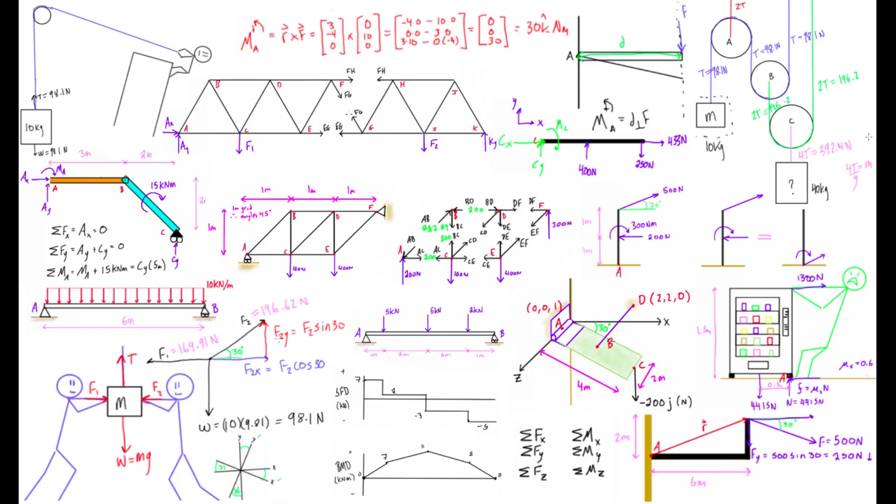Today I am going with very basic and fundamentals of mechanical engineering, that is engineering mechanics. Because one cannot reach the destination without starting from zero. Let's start with introduction to engineering mechanics. Engineering mechanics, my knowledge sharing session.

Let's discuss about applied science. The branch of science which coordinates the research work for practical utility and services of the mankind is known as applied science.

Engineering mechanics. The subject of engineering mechanics is that branch of applied science which deals with the laws and principles of mechanics along with their applications to engineering problems. As a matter of fact, knowledge of engineering mechanics is very essential for an engineer in planning, designing, and construction of his various types of structures and machines.

In order to take up his job more skillfully, an engineer must pursue the study of engineering mechanics in a most systematic and scientific manner.

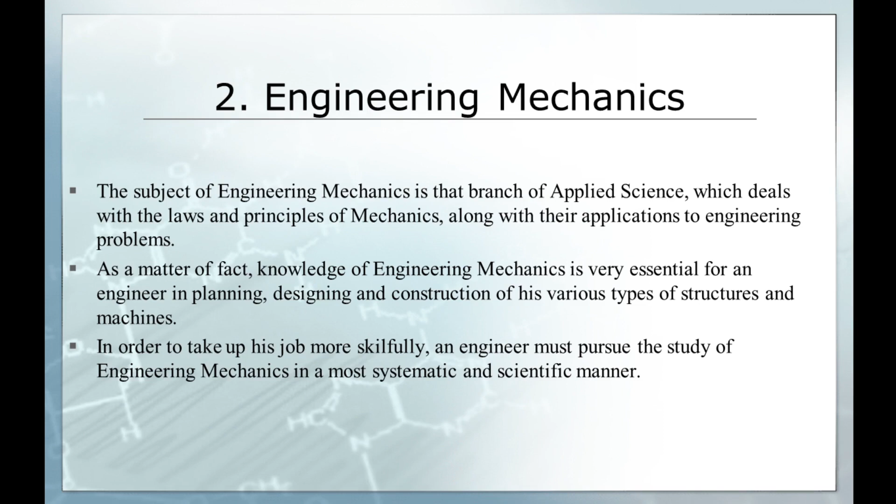Divisions of engineering mechanics. The subject of engineering mechanics may be divided into the following two main groups: first, statics, and second, dynamics. Statics is that branch of engineering mechanics which deals with the forces and their effects while acting upon the bodies at rest.

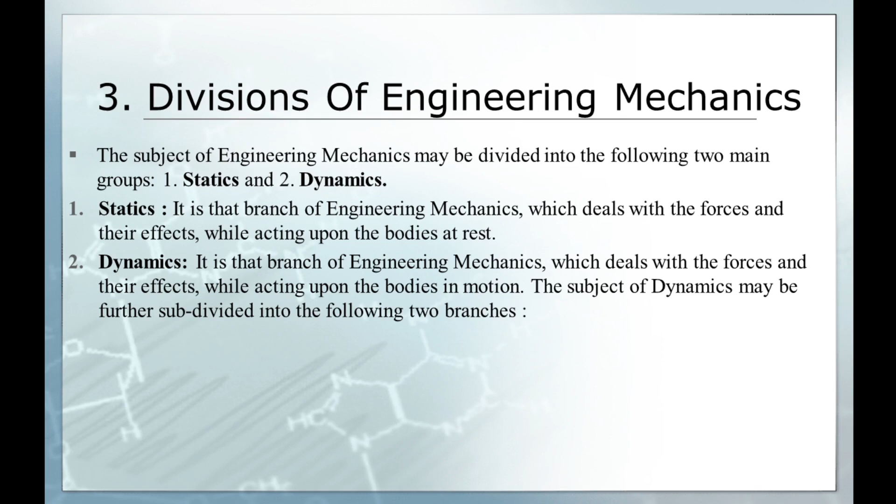The second is dynamics. It is that branch of engineering mechanics which deals with the forces and their effects while acting upon the bodies in motion. Friends, see the difference between statics and dynamics: statics when bodies are at rest, dynamics when the bodies in motion.

This subject of dynamics may be further subdivided into the following two branches: first, kinetics and second, kinematics. Let's see what is kinetics and what is kinematics.

Kinetics is the branch of dynamics which deals with the bodies in motion due to the application of forces. Kinematics is that branch of dynamics which deals with the bodies in motion without any reference to the forces which are responsible for the motion.

So the difference is that in kinetics, the body has gained motion due to some application of forces. But in the case of kinematics, the body is in motion, but without any reference to the forces which are responsible for the motion. It means for that motion, these forces are not applicable, or because of these forces, the body is not getting any motion.

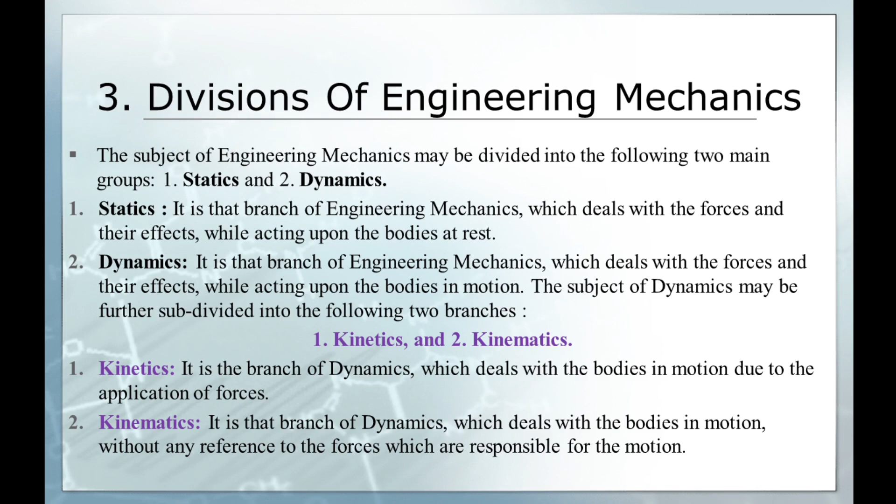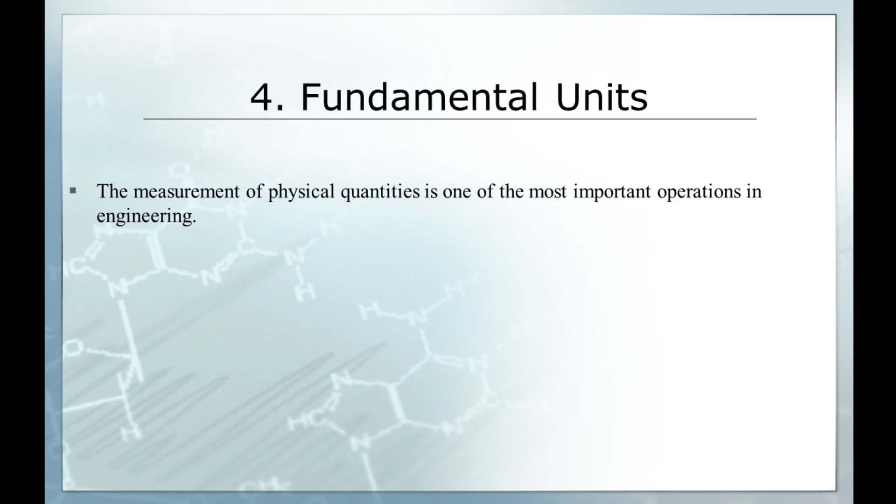Fundamental units. The measurement of physical quantities is one of the most important operations in engineering. Every quantity is measured in terms of some arbitrary but internationally accepted units called fundamental units.

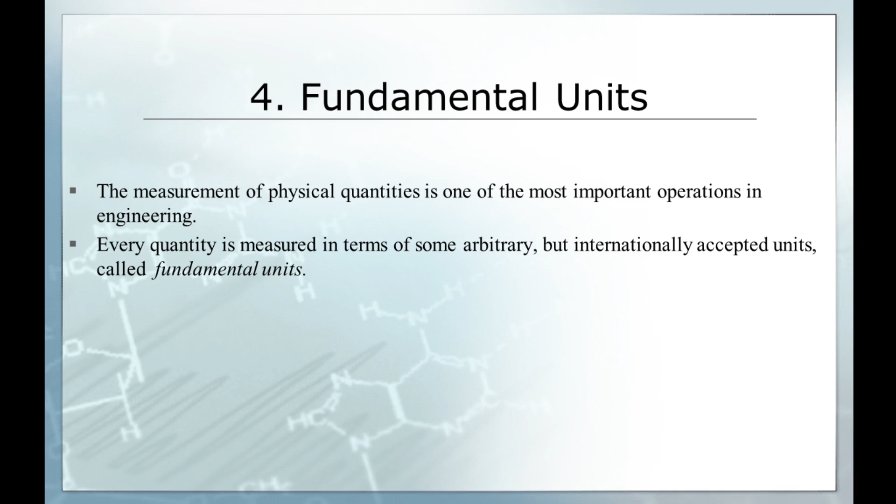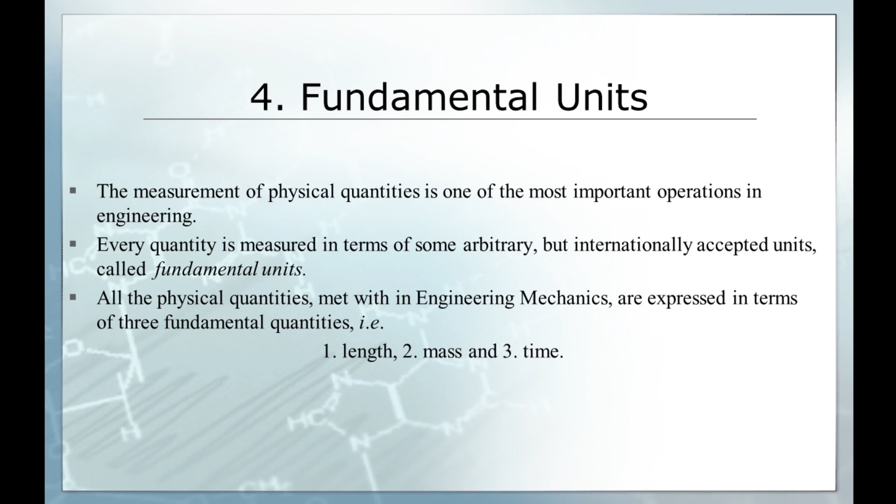All the physical quantities met with in engineering mechanics are expressed in terms of three fundamental quantities: first length, second mass, and third time.

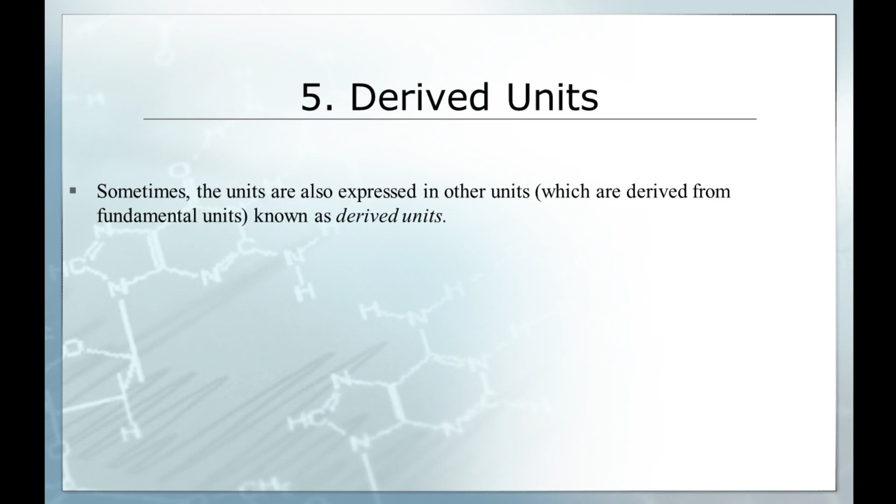Derived units. Sometimes the units are also expressed in other units which are derived from fundamental units, known as derived units. For example, units of area, velocity, acceleration, pressure, etc.

Unit of area is mm square. Mm square is not a fundamental unit, but it is derived from the formula of multiplying or dividing or by doing some mathematical calculations and deriving that unit. So that is why unit of area is called a derived unit.

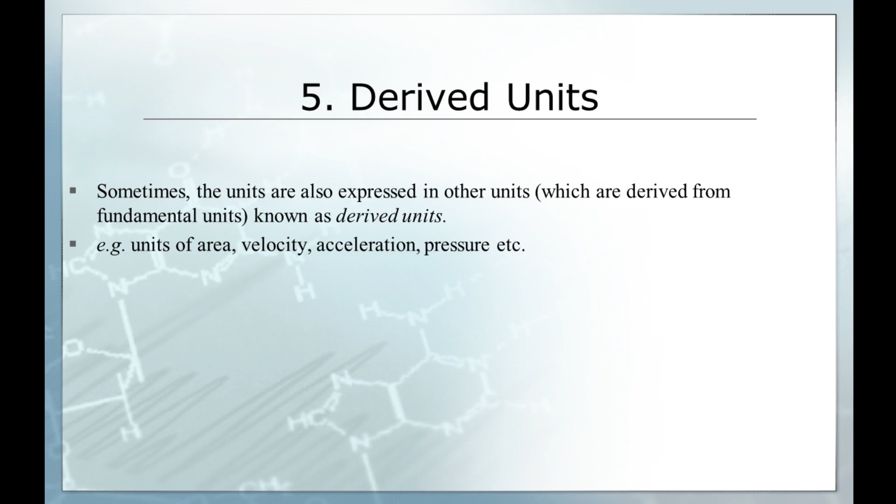Similarly, unit of velocity is meter per second. Unit of acceleration is meter per second square. Unit of pressure is Newton per mm square or Newton per meter square, etc.

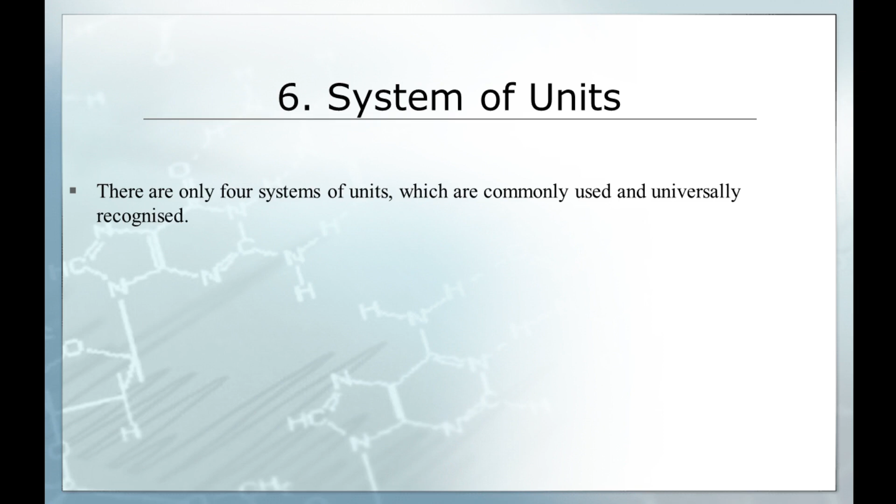System of units. There are only 4 systems of units which are commonly used and universally recognized. These are known as: first, CGS units, centimeter, gram and seconds. Second, FPS units, foot, pound, seconds. This system is still being used in the USA, United States of America.

Third, MKS units, meter, kilogram, seconds. And fourth, SI units, called International System of Units. We shall use only the SI system of units as explained ahead.

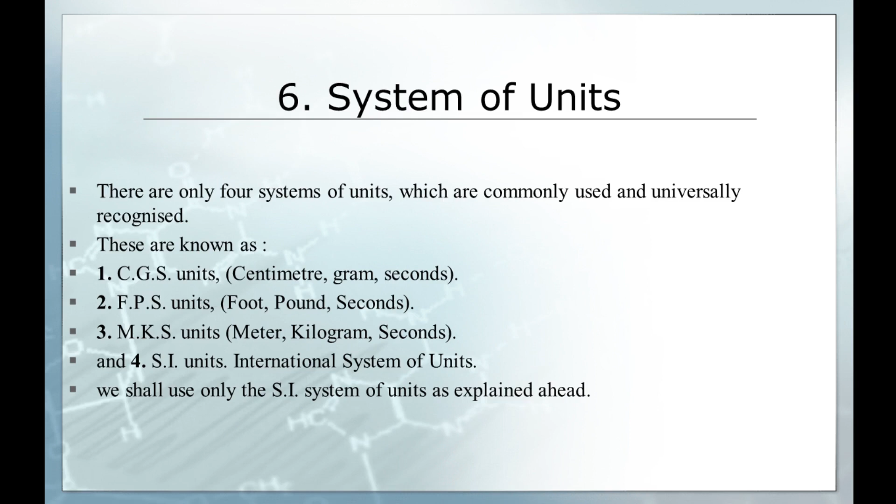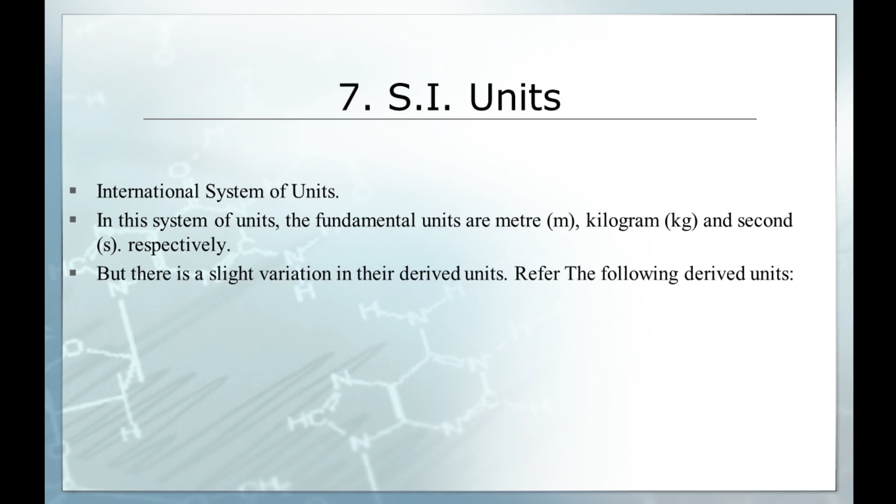SI units, International System of Units. In this system of units, the fundamental units are meter, kilogram and seconds respectively: length is measured in meter, mass is measured in kilogram, and time is measured in second. But there is a slight variation in their derived units.

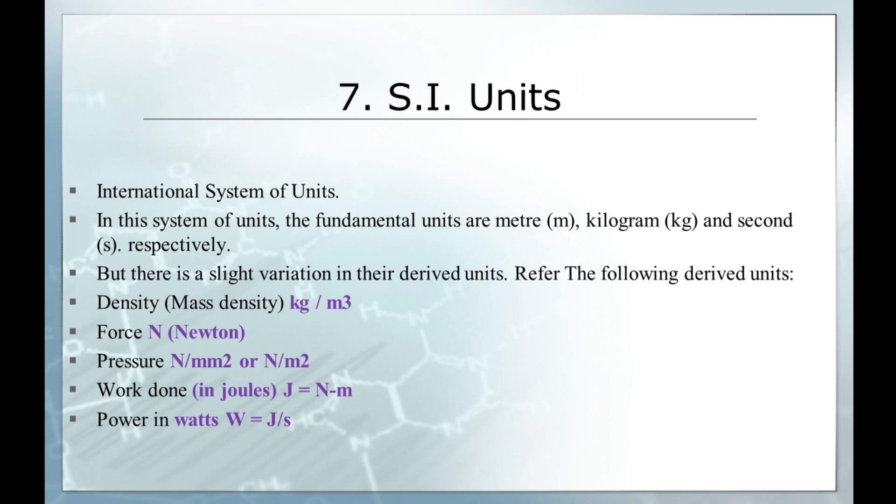Refer the following derived units: density, mass density, which is measured in kg divided by meter cube; force, which is measured in Newton; pressure is measured in Newton per mm square or Newton per meter square; work done is measured in joules or Newton meter; power in watts, joule per second.